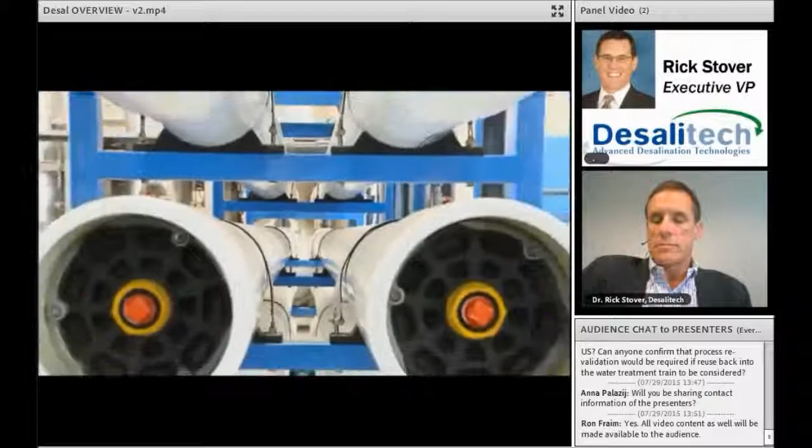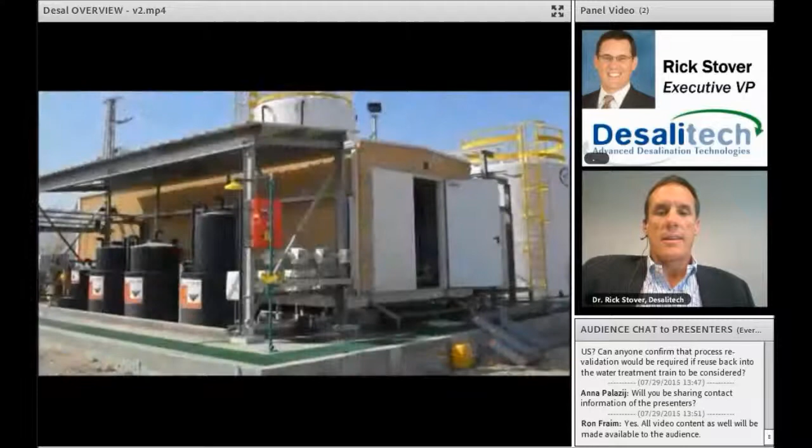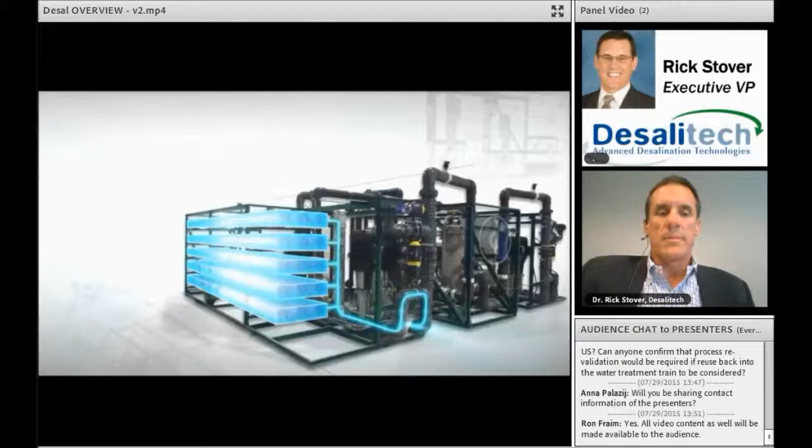Today, over 70% of production facilities in the U.S. purify their water supplies. The majority use a process called reverse osmosis, or RO, which removes salts and contaminants, producing a stream of pure water. But RO is a 60-year-old process that creates excess waste, consumes too much energy, and does not use water supplies efficiently. Yesterday's technology cannot solve today's problems. Desalitech has the solution. Our Reflex RO systems open a new era of water treatment efficiency. Thanks to our patented closed-circuit desalination, or CCD technology, Reflex systems maximize the usefulness of water resources, reducing disposal costs by 50 to 75% and energy consumption by 35%. This is driving major operating cost savings and providing a return on investment within months while being environmentally responsible. Smart yet simple, Reflex RO systems perform reliably around the globe. With our partners, we are solving water problems and achieving notable savings across multiple market sectors. Desalitech, leaders of high-efficiency water treatment and reuse.

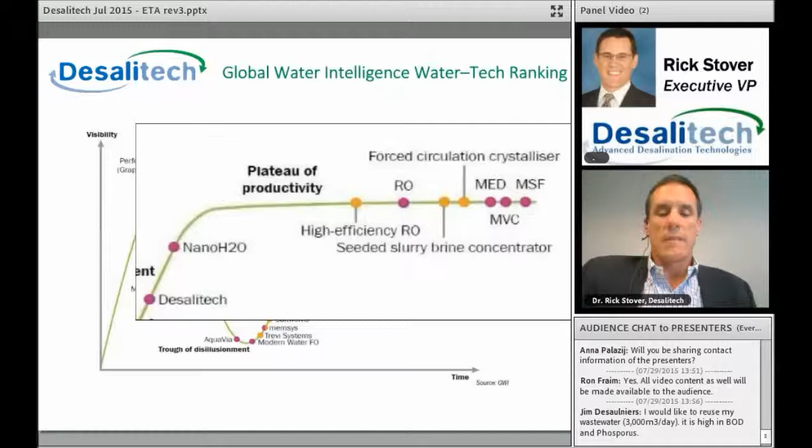If you focus on the right-hand portion of the curve, which covers technologies that have been around for a long time, I'll zoom in. What you see there is MED, MSF, MVC - thermal technologies like distillation. RO, reverse osmosis, has also been around a long time. These are the platforms purifying water and doing water reuse now in many places around the world. There are countries getting the vast majority, if not all, of their drinking water supply from saltwater sources.

So I'll zoom back out for a minute and look at the steep part of the curve. These are essentially emerging technologies, emerging companies. What you see is Desalitech shown as pretty advanced in terms of getting productive, due to the number of facilities we have and how readily adoptable the process and products are. But I also want to point out that the other companies shown lower down on the curve - most of them are in an orange color.

In this chart, that orange color means they're brine concentrator technologies. I'm going to get to in a second why it is that so many companies are pursuing that. But one thing I'd like to say first is that most of these companies started out trying to be desalination and water reuse companies and shifted their business plans eventually. If you look back further on the curve, you see a lot of the companies descending from the peak of inflated expectations to the trough of disillusionment, still trying to be desalination and water reuse technologies.

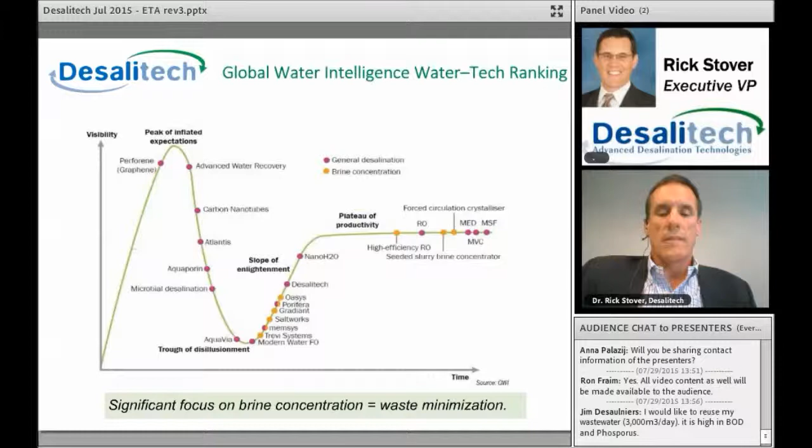So there's significant focus here on brine concentration, and what that really means is waste minimization. This is a cost of ownership breakdown for a typical brackish industrial desalination or reuse treatment system of about 370 gallons per minute. What you see in the center is a typical operation at 75% recovery. That means every 4 gallons of water coming into the system, 1 gallon goes out as reject waste - 25% reject. The cost items are capital cost, energy, O&M, and the cost of water.

As you can see, by far the largest cost of ownership over a 10-year life cycle is the cost of water - the excess water you need to bring into the system and then throw away as concentrate. If you can raise recovery from 75% to 95%, as shown in the right-hand column here, you can cut the cost of ownership of these systems in half. That's why, on the previous slide, so many companies were going after brine concentration and waste minimization.

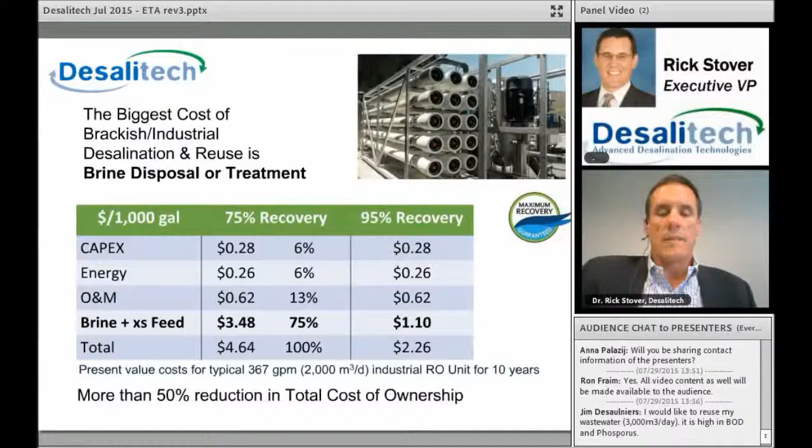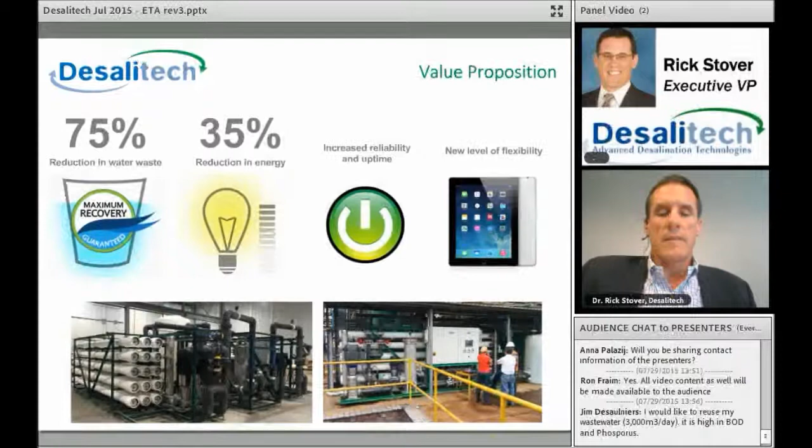It really is the highest cost of ownership component in these types of RO treatment systems. So Desalitech's value proposition is increased recovery and thereby a reduction in water waste. Our systems also consume less energy - especially important in seawater desalination applications, but also in brackish industrial and water reuse applications. Our systems have higher uptime, they're more reliable, and they offer a level of flexibility not known in reverse osmosis systems before. I'll explain why that's the case as I move into the technology.

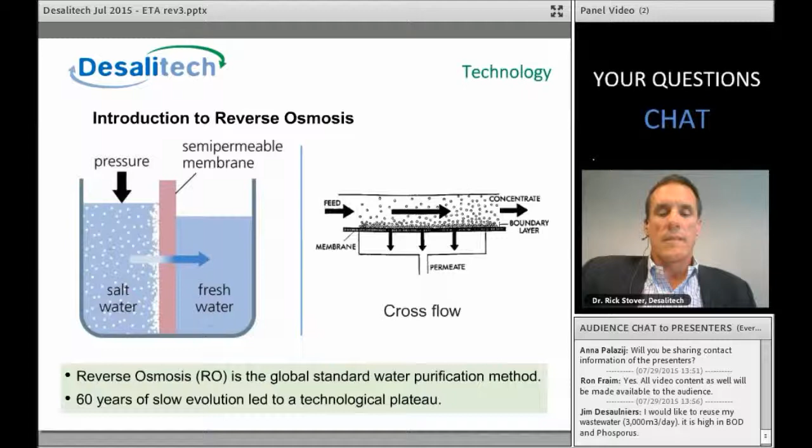Pressure is applied, water permeates through the membrane down in this picture, and then the sweep of feed and concentrate past the membrane surface takes water away, takes salts away, and removes the concentration buildup on the surface. This cross flow is essential to make RO membranes work. RO is really the workhorse for water purification. In Abigail's presentation, most of the water reuse schemes she showed have a reverse osmosis component in them.

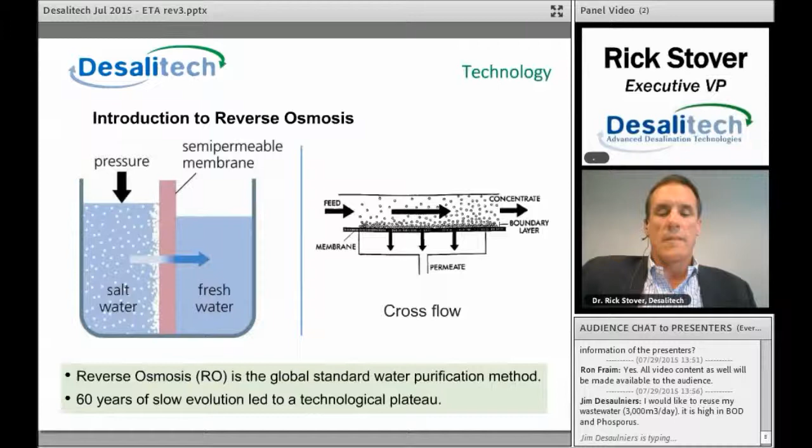If you have to do water purification, you want to do it with reverse osmosis. It's the most affordable and reliable way to go about it. However, modern reverse osmosis hasn't really evolved as a process in the 60 years or so that it's been used. It's really hit a technological plateau until now.

This shows how RO is done in practice. This is a traditional multi-stage reverse osmosis system. You need multiple stages to get to high recovery, but unfortunately, adding stages adds complexity, cost, and inflexibility. And if the system gets out of balance, it's subject to fouling, scaling, and reduced recovery.

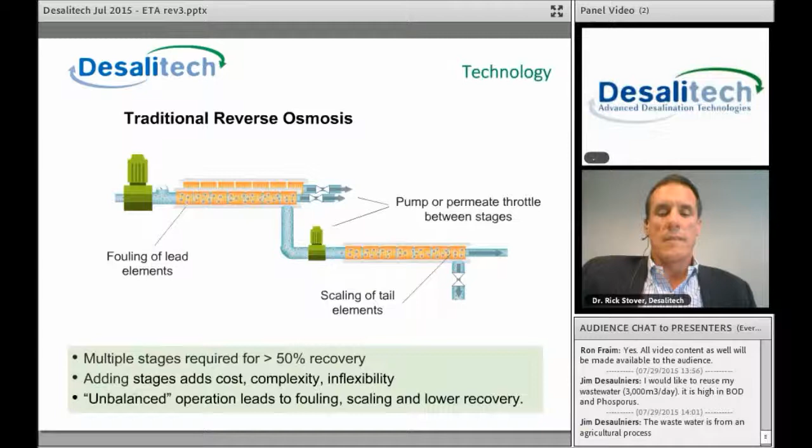This is a simple filtration, a different kind of filtration, actually the most common kind. Here, a filter takes out the dirt or whatever's in the water, and all the water comes through, so you're operating at 100% recovery. All the water in goes out, and every once in a while you either flush the membranes or replace them. The advantage is unlimited recovery. The disadvantage is you can't use this for RO because you don't have the cross flow.

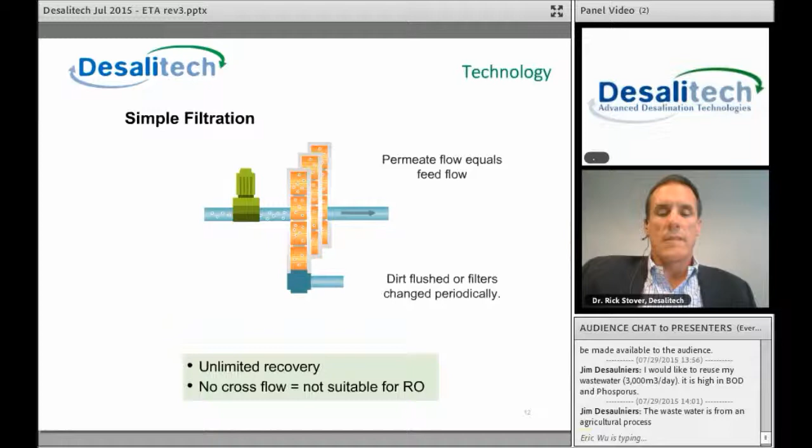Desalitech introduces this breakthrough in the RO process, and we call it ReFlex RO. Really, it's a combination of the last two technologies shown. There's a high pressure pump that feeds a single stage membrane array. Concentrate is returned to the membrane feed with a circulation pump, and it continues like this without releasing any of the concentrate, producing the purified water stream.

Periodically, the brine valve opens and the salts and concentrate flush from the system. So it operates in two modes: closed circuit with 100% recovery, and then flushing mode, and that latter is about 10% of the time. With this process, we are able to achieve up to 98% recovery in a single stage. Basically, the longer you allow the concentrate to recirculate, the higher the recovery gets.

So that recovery rate is set at the control panel. You can program the system to release the concentrate whenever, as soon as or as late as you like. And that flexibility in being able to adjust recovery at the control panel is a tremendous advantage from both a design standpoint and from an operation standpoint. The cross flow that you need for RO is done by the circulation pump, and that's adjustable as well.

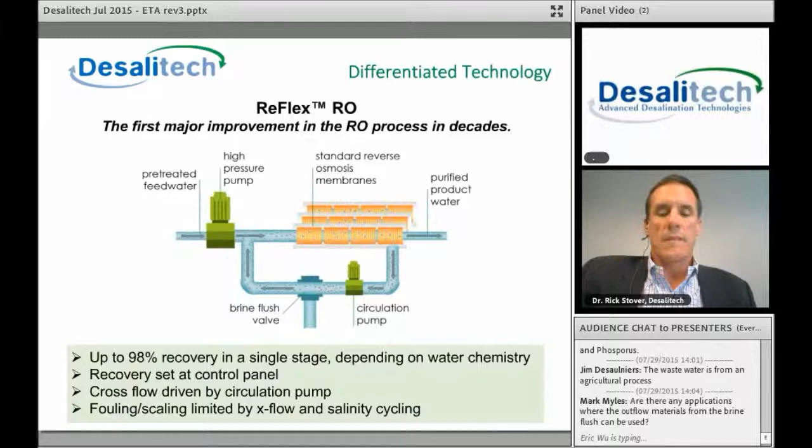And then finally, fouling and scaling of the membranes, which can be a problem especially in water reuse applications, is limited by the good cross flow in these systems, and also the cycling of salinity from high to low disrupts biofouling.

Briefly about how this technology came about: it was actually developed by a professor of physical chemistry who had a vision for hydrostatic closed circuit pressurization and depressurization. It's more energy efficient, and the batch-like operation allows for higher recovery. So those are really the goals.

The first patent on this approach was issued in 2008. It was only in the last few years that the company moved to the United States, which is actually the biggest market for industrial and brackish water and reuse with reverse osmosis. Our company headquarters is in Boston. Our first food and beverage project was in 2014, and I'll talk about that project and some others here.

I'm actually going to skip this case study in the interest of time and talk about these. The one on the left is Mid America Steel, a water reuse project. It was a melt shop manufacturing site with a very dirty cleaning water circulation loop. We are now recycling that water back into the plant for continued use and dramatically reducing the amount of water that had to be hauled off-site. About a 6-week ROI on that project just based on the reduction in waste generated.

The one on the right is a food and beverage plant. Again, by increasing the efficiency with which they were treating the water, raising recovery, and lowering the reject flow, that project enjoyed a less than a 1-year ROI.

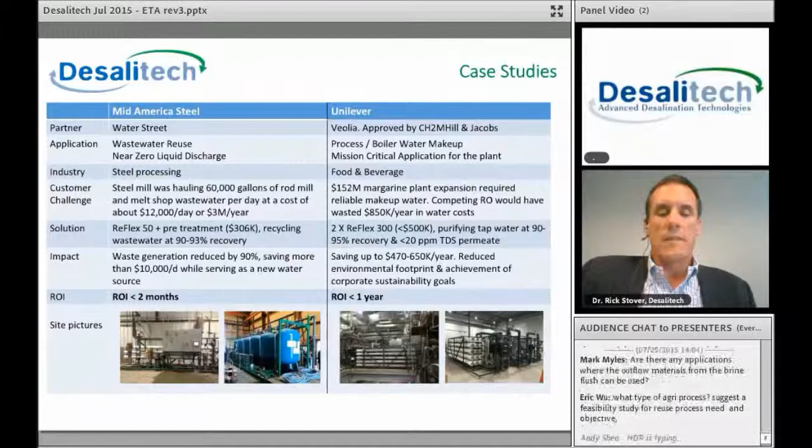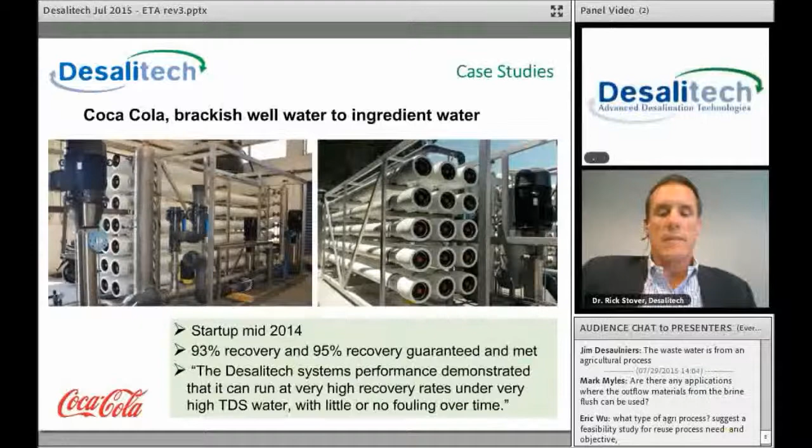Here's another project, with Coca-Cola. What we're doing here is taking brackish groundwater, taking the salt and minerals out of it, and using it for ingredient water in Coca-Cola projects. This is 2 systems you see in the pictures here. One of them operates at a guaranteed recovery rate of 93%, and the other at 95%. Both of these have been operating since last year.

High recovery is essential to minimize the amount of reject. Downstream processing of the reject brine can be expensive, so our operation here minimizes the amount of that stream, and then it can be handled efficiently downstream.

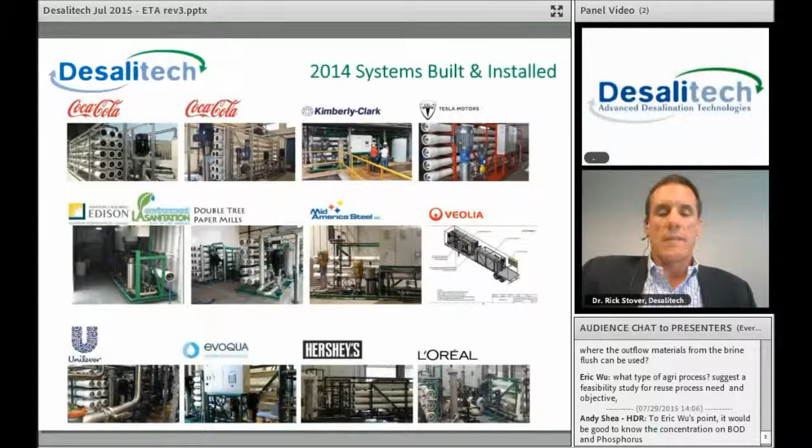So Mid America Steel, I talked about, another water reuse project. Hershey's is a wastewater treatment project, also in the food and beverage sector. Our experience with water reuse has led to us being specified for a project with the City of Los Angeles, another water reuse project like the LA Sanitation District project. So these systems work very well for water reuse, primarily because of the fouling resistance and high recovery rate.

Turning to potentially your application and understanding whether it's worth it to implement a Desalitech system: if you can raise recovery on your RO process from 75 to 94% recovery, which is typical, this is typically the value proposition that Desalitech brings, you can enjoy less than a 3-year ROI, even if your cost of water is only $2 per 1,000 gallons.

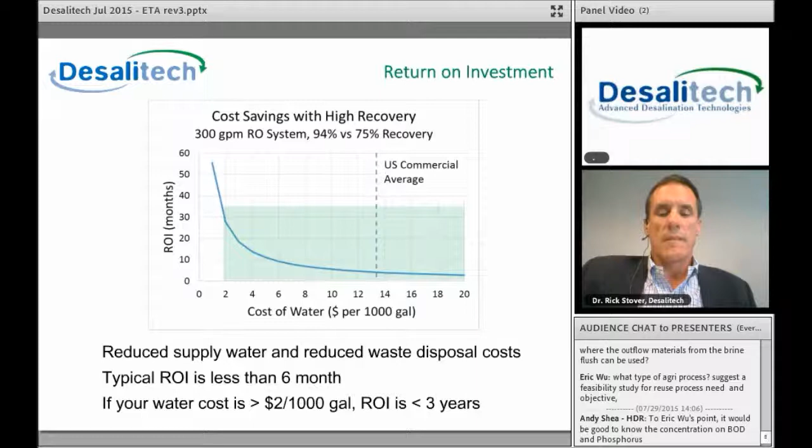The average cost for commercial water supply and wastewater treatment is about $13 per 1,000 gallons. So even if you're a tiny fraction of the average cost in the U.S., you'll get a less than 3-year ROI with higher recovery RO.

So Desalitech's value proposition again: high recovery, along with fouling and scaling resistance. Our systems are built out of standard reverse osmosis components. Our innovation is putting those components together in a new way. And then finally, as a new company, or really as any company in this space, we offer excellent customer service, and that includes being able to remotely monitor and control our systems.

So let's work together. The way we go about designing and implementing projects is first, we get your water analysis, an analysis of the composition of your water. With that, we can do a design and cost it out and give you a guaranteed performance on recovery rate and on energy consumption. So we do pilot systems, although generally speaking, it's not necessary to pilot an RO system.

They work according to their design, and this is pretty standard across the industry. Nevertheless, we do have pilot systems available. We have a standard product line of RO systems from 10 gallons a minute up to 1,200 gallons a minute. If you check Desalitech's website, you can see a listing of those products and services.

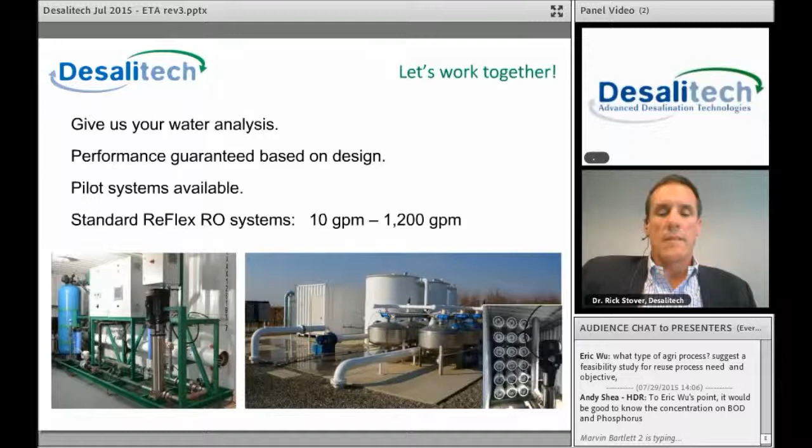And so with that, I'll thank you for your attention and take some questions.

Hey there, you caught us all unawares because you finished 2 minutes early. Quite a lovely presentation. I want to thank Andy Shea for introducing us to Dr. Stover. That's how we met, and thank you, Rick. So why don't you start, Andy? Why don't you start with questions? Was he as good as you hoped he would be?

Sure thing. I think Rick's been on the cutting edge on a number of technologies, whether or not it's seawater desalination or industrial reuse. Obviously appreciate his perspective. Rick, you talked a little bit about high recovery systems, and I think we're getting into the area of, if it wasn't zero liquid discharge, it was probably near zero liquid discharge. Are you seeing some of your client base being driven to reducing or eliminating their discharge as being a fundamental driver?

Well, yeah, you're welcome. So, question again? Sorry? Rick, are you saying zero liquid discharge as being a driver for some of your systems in the marketplace?